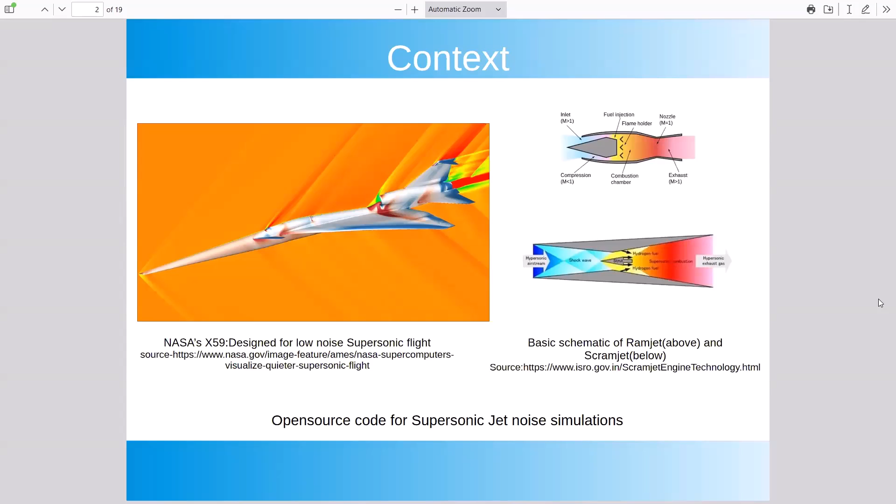So my plan of action initially was I will conduct a RANS simulation. From the RANS simulation, whatever I understand, I'll do an LES calculation - LES is large eddy simulation. And from the LES data, I will sample some data points, and then from there, using the pressure and velocity, I will calculate the noise that the jet generates.

However, in terms of understanding, what happened was exactly the opposite. I didn't get good RANS results. I went forward with the LES anyway. I got poor LES results, I got poor noise results. However, from the noise results that I got, I understood what was probably happening incorrectly in the LES calculation, and from there, what was happening incorrect in the RANS calculation.

So at this point I have to correct something, which is that we are not working with RANS, we are working with URANS. Why is that distinction important? You'll come to know even later on, but primarily, when we are trying to simulate a jet, you have a region in the center, which is the actual jet, which is a supersonic region.

When you look at the governing equations, you'll find that such high speed, high velocity flows will generally have a hyperbolic character. However, the ambient air will have a parabolic character. And it turns out that if you have such a domain where you have hyperbolic and parabolic parts, you cannot have a steady state solution. So you can't proceed with RANS. That was also my experience, although I didn't know about this thing at the time - I just kept trying with RANS and never getting a solution. But it's good that I know this now.

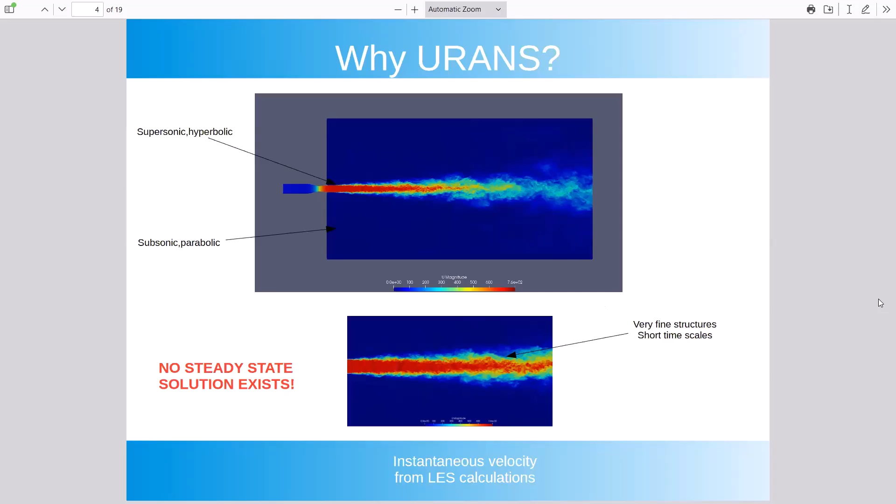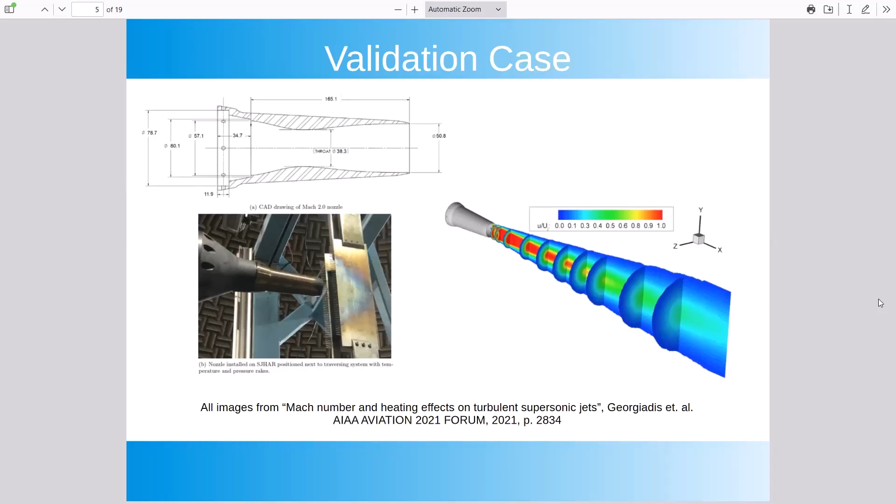So I'll briefly mention what I'm trying to compare my results to. This is an experimental work published in 2021. The thankful thing about this work was that, for reference, what we generally had for a Mach 2 jet was a jet called Seiner's jet, which was basically only centerline data for velocity, pressure, temperature. Thankfully, as we are working with turbulence, this recent dataset also had some centerline values for the Reynolds stresses.

So when I started working in OpenFOAM, I went through what models were available, what solvers were available. What I came to know is there are basically two solvers that people use. At this point, in some version of OpenFOAM, the first solver is obsolete, but I'll proceed anyway - that is Sonic Foam. From here on, I'll refer to it as SF. The second one was Rho Central Foam, RCF.

In the course of my work, I also tried a third solver because I couldn't get good results with either of these two - that is called Rho Energy Foam. It is an independent solver, not part of any original OpenFOAM distribution, but independently developed by two researchers at University of Roma Sapienza. The basic difference between these solvers is how the flux is calculated in the cells. I won't get too deep into that, but that is the main distinction between how they work. They solve the exact same governing equations, but they only calculate flux differently.

The other thing I was working with in parallel were the turbulence models. What I had already seen was that two equation models like K-epsilon, K-omega were known to not give good results with these jets. So I knew that OpenFOAM also offers some RST, Reynolds stress transport models, which will solve for all of the Reynolds stress components individually. So this is the basic set of what I am tackling within OpenFOAM.

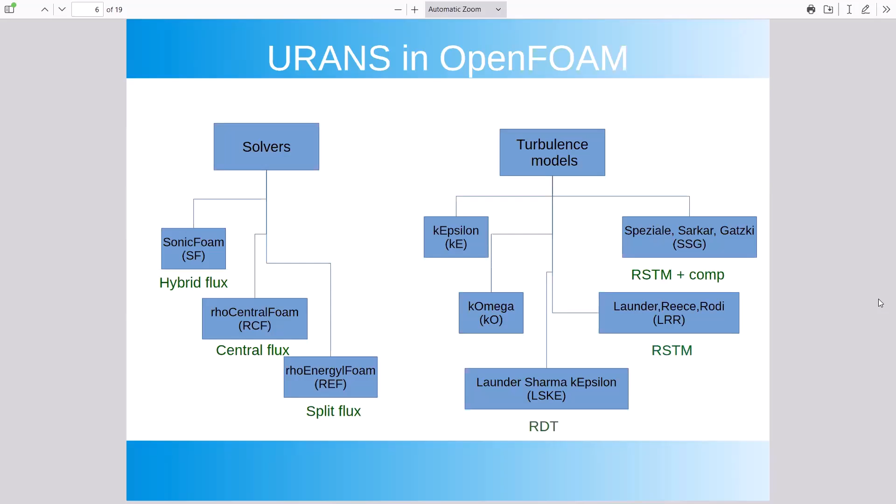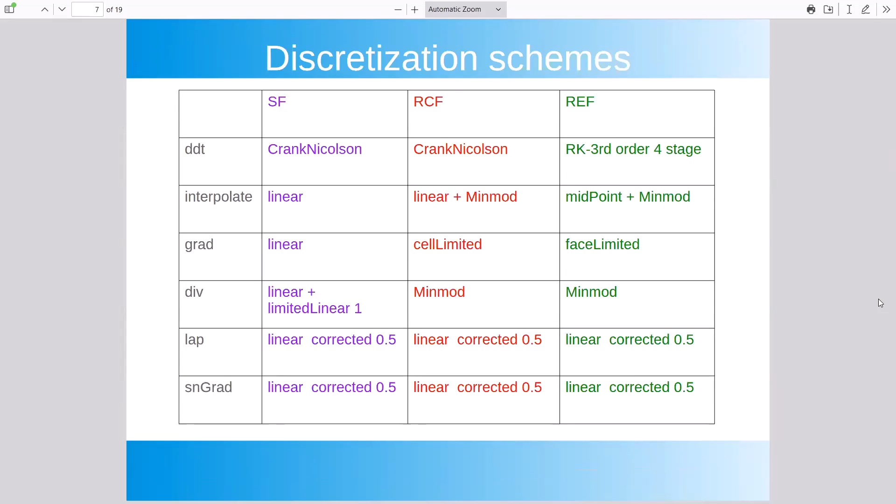Just because we are trying to make results repeatable, I wanted to include this slide. This was what I spent almost a year trying to figure out, as to what discretization would give reasonable results. I won't go too deep into this, but this presentation will be available, so anybody trying to reproduce the result will find this helpful.

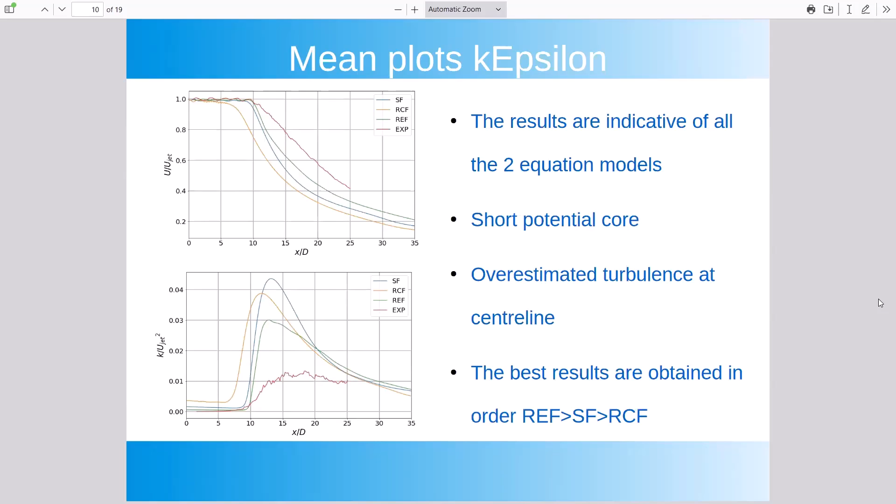This was one of the shortcomings that was very obvious to me when starting the RANS work with two equation models. Now I'll get to the RSTM model. In the RSTM model, the results were better—if you compare it to these, they are definitely better. But the location of the peaks, some of them are too high, so these problems still persisted.

So I tried to figure out what's exactly happening. As I mentioned, the LES results and the noise results kind of indicated what's wrong with the RANS result, and the problem was numerical dissipation.

As a rule of thumb, if you remember nothing else from my presentation, remember this: for a jet, if the numerical dissipation is low, you get a longer potential core. This was one thing that took me a year to understand.

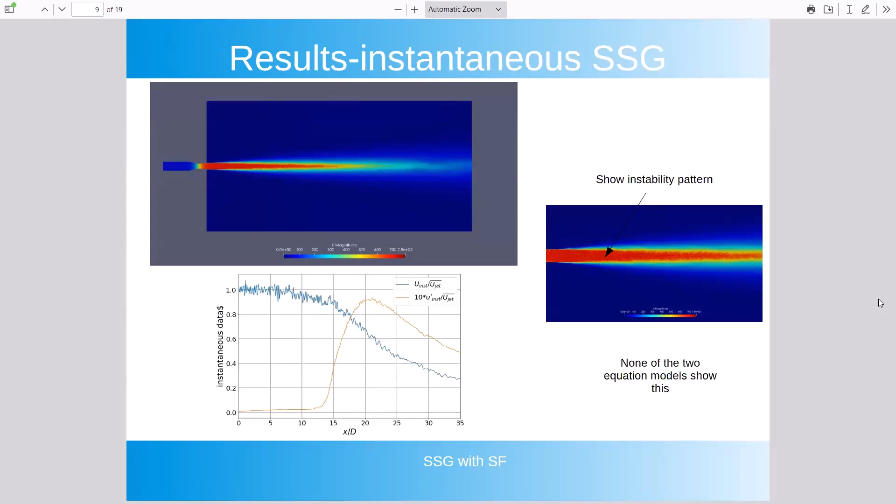The other problem that I faced was in some calculations, I was getting a longer potential core. That was another issue I was not able to figure out why that was happening, and it took me a while to figure that out.

I'll just reiterate. The shorter potential core was an indication that the solver plus the RANS turbulence model together are creating too much numerical dissipation. But what was the reason for a longer potential core? That again took me a while to understand. So this is the gist of what I understood.

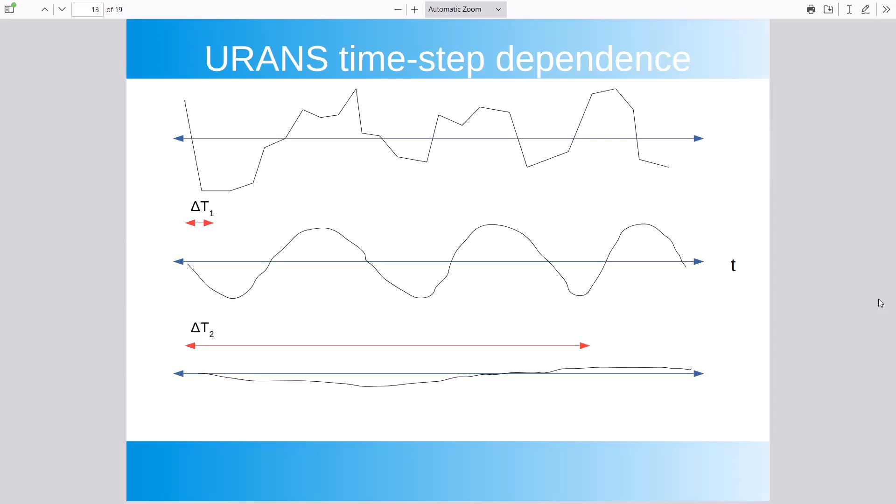If you look at a signal and try to find what you get as a time average, you have a choice of what your sampling window should be. You'll see that if the top one is the original signal, taking a very short time step gives a fairly good, smoother representation of the original data set. However, if you increase your window significantly, you will almost get zero as your long-time means values.

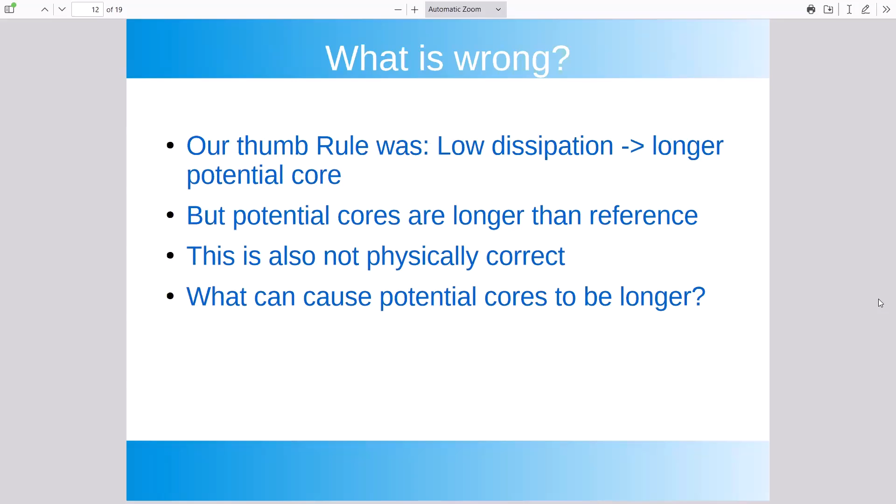So what was happening was that when my time step was too large, the flow gradients were getting smoothened out. And when flow gradients get smoothened out, especially for velocity, they affect the amount of Reynolds stress that gets generated. The issue I was facing was that the Reynolds stress was being under-predicted and the mixing was being under-predicted.

So this is what I wanted to show. The best solution I got was with sonic foam and an SSG model, an RSTM model with compressibility terms included. Initially I got good small scale resolution with it, but I was seeing that it was still too long — the potential core was too long.

The reason was that when I did the calculation, all I cared about was getting a stable calculation with the maximum time step. But it turns out the other solvers besides sonic foam were actually using a much smaller time step. Sonic foam just happened to be more stable with a much larger time step — almost 5 times larger than the others.

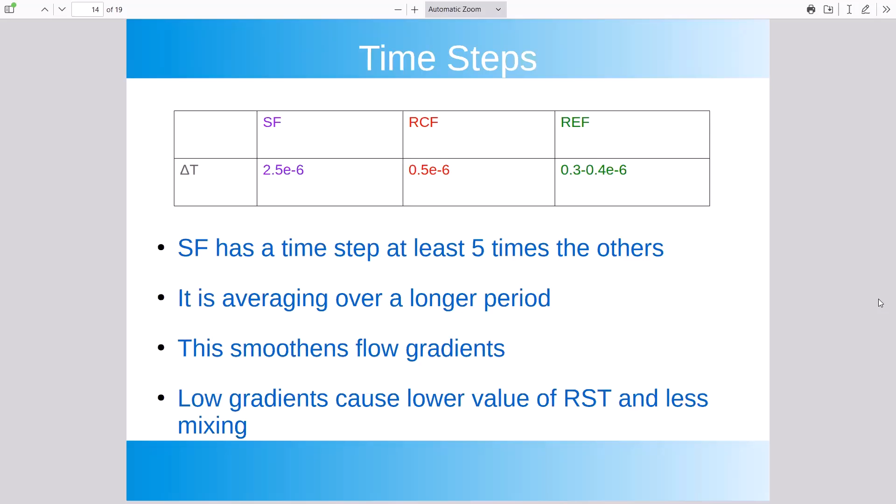And what was happening was that the transient term was actually an average over a much longer time period, and it was actually smoothing out all the gradients. So this is what happened when I changed the time step. I changed nothing else in the calculation with sonic foam — I only changed the time step.

But then the issue was that I was going to do an LES anyway. So eventually, instead of doing URANS on a much finer grid, I simply did an LES on that finer grid.

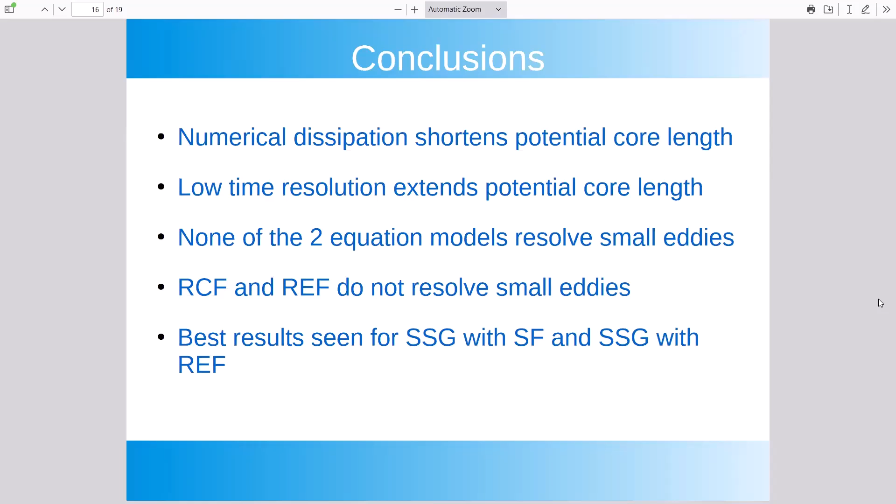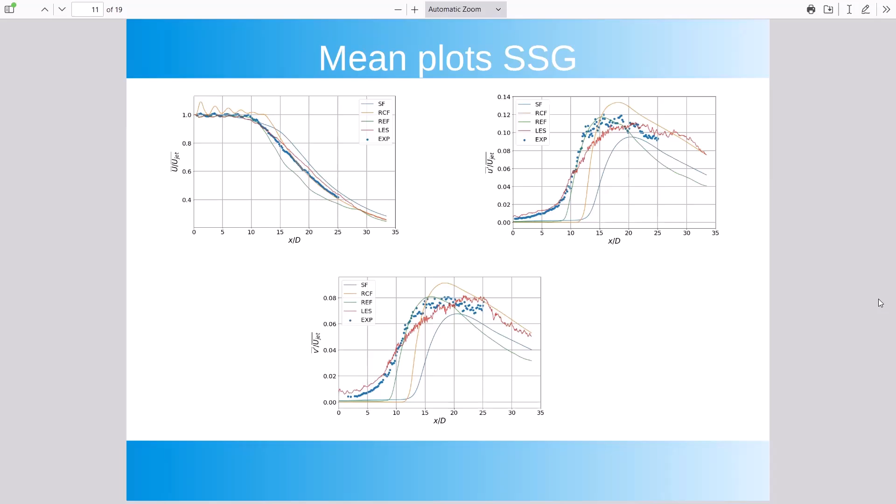So when I reached LES at this point, I simply quit with the RANS. I knew what was wrong in the RANS, which was probably an issue of resolution. But since I could do the LES, I just went ahead with the LES.

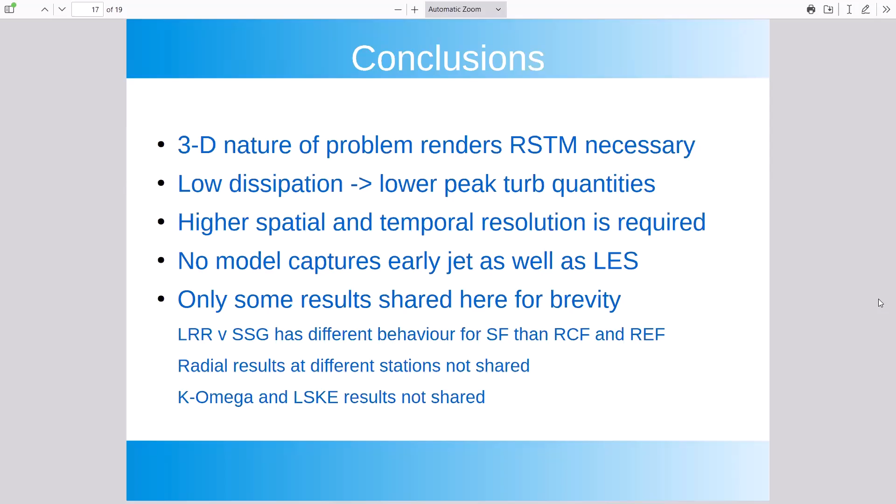Yeah, so there are other results here. Primarily the two things were for me to figure out why the potential core was too long or too short. I did that, but also because I used 3 solvers and 5 models, I had 15 calculations in total. So there are other patterns I saw, but since this is supposed to be only a 15 to 20 minute presentation, I'll keep those results for the final paper rather than discussing them here.

So what is the motivation for this present work? The motivation comes from nature, particularly species of birds who can sweep their wing angles and also modify the effective angle of attack to enhance their aerodynamic performance. As humans, we always try to do biomimicry, to understand the physics of nature and apply it to engineering systems. Here you see an example where an unmanned air vehicle has been built with varying sweep angle to mimic the physics we see in natural flyers.

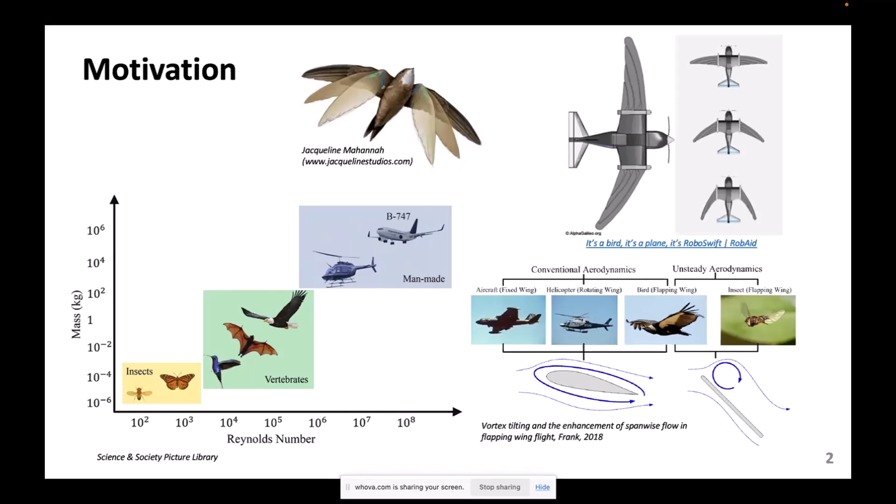This study is carried out at a Reynolds number of the order of 10 to the power 4, which is in the region of small birds, so it mimics the physics we observe in nature for a larger insect or small bird. Our study is focused entirely on understanding the unsteady nature of the leading edge vortex, which is quite complex at this low to moderate Reynolds number regime, and has very rich flow dynamics within it, which is the main focus of this study.

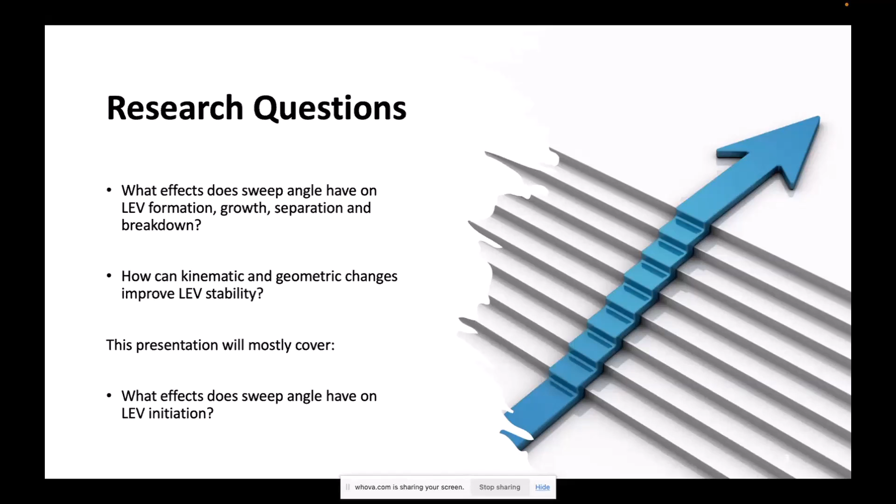Now, what are the main research questions that led to this work? The first, broad question is: what effects does sweep angle have on the LEV formation, growth, separation and breakdown? And how can kinematic and geometric changes improve LEV stability? Given that it's a 10-minute short presentation, I can't tell you everything, but I will mostly focus on what effects the sweep angle has on the LEV initiation.

Now, just to clarify the kind of geometry we are dealing with: we have studied many different sweep angles, many different aspect ratios, and many different cross-sectional profiles of the wing. But for this short presentation, I will mostly present the aspect ratio 3 wings with a NACA 0008 profile, with 3 different sweep angles: 0 degree, 30 degree, and 60 degree.

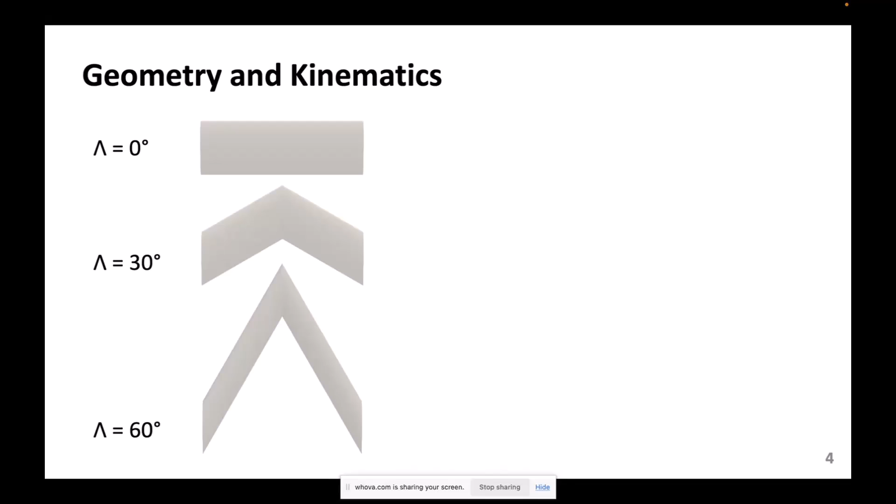This is a representative figure of the experimentally manufactured wing that we are going to test in the water channel at the University of Edinburgh, to measure the flow field and the forces, and also to visualize the flow field using PIV.

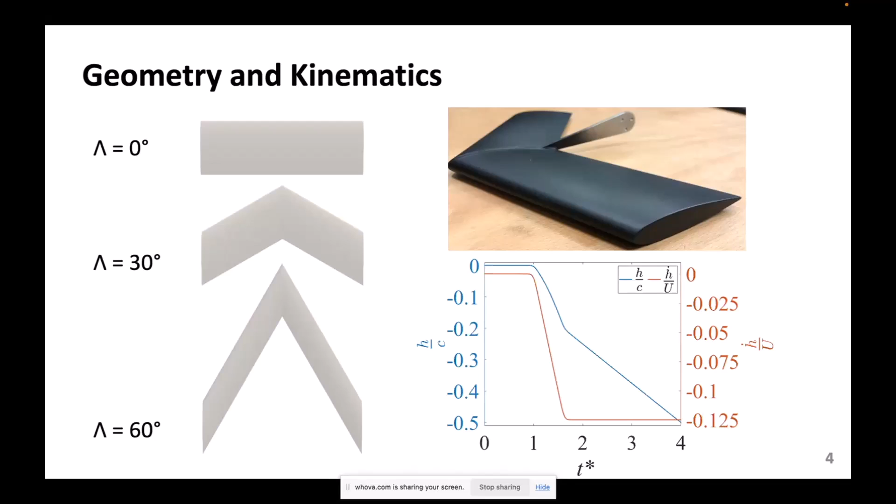For this particular presentation, I have chosen a ramp kinematics. As you can see, the plunge, that is the translational motion rate, is a ramp here, shown in the red curve. That's because the h dot, the rate of the plunge divided by the free stream oncoming velocity, gives us the effective angle of attack, which also gives this resulting plunging kinematics, shown in blue here.

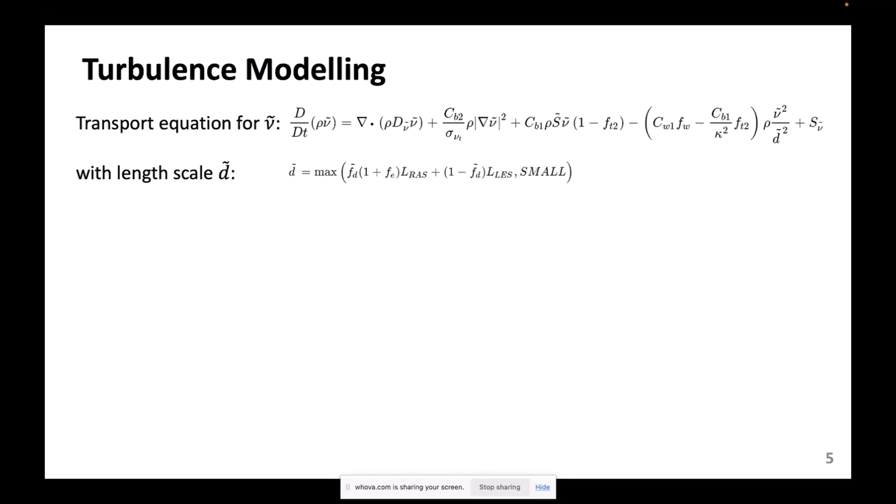I want to first confirm that we are using this Spalart-Allmaras based improved delayed detached eddy simulation model. As you all know, the main difference from the other variants of DES is that the turbulent viscosity formula is based on a modified length scale, d tilde, which is based on the wall distance for the RANS model and the mesh size based length scale for the LES model.

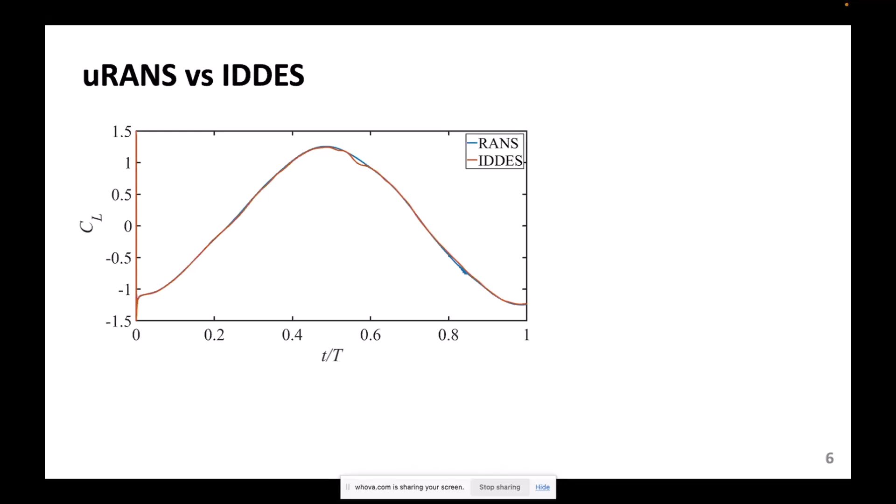Before going into the physics, I want to show you the comparison between the unsteady RANS and the IDDES results. This comparison has been done for canonical plunge kinematics, which is sinusoidal in nature. As you can see, the coefficient of lift is almost very close between the two. Only there are some fluctuations captured at the peak, which correspond to fluctuations in the leading edge vortex.

As you can see in the Q criterion flow visualizations, in comparison to the RANS model, we can capture way more small turbulent structures, and the interactions between the leading edge vortex and the tip vortex, very clearly using this IDDES model. So this is the motivation for us to choose the IDDES model for our further investigation.

This is to clarify the coordinate system. Our origin of the coordinate system is at the root of the wing, and the X and Z axes are along the chord and the span.

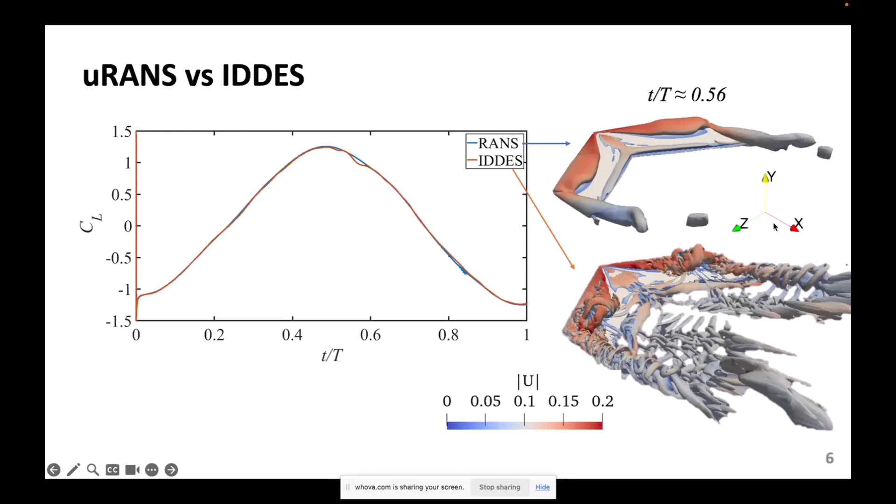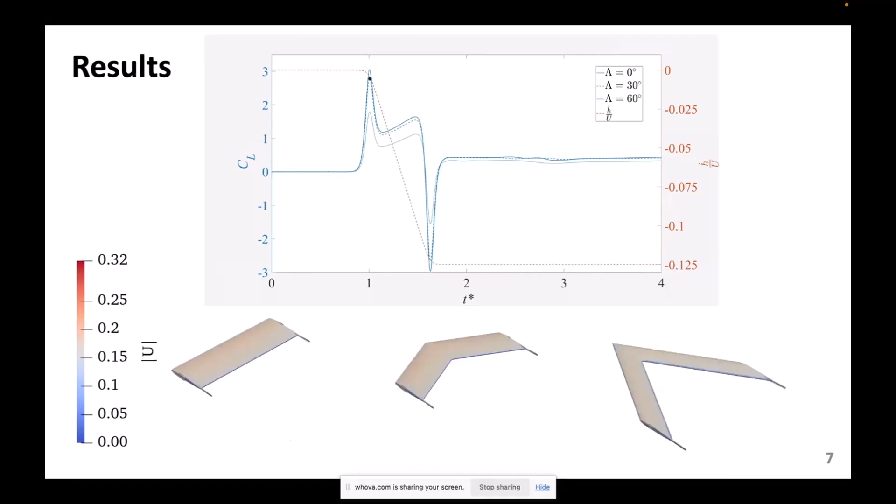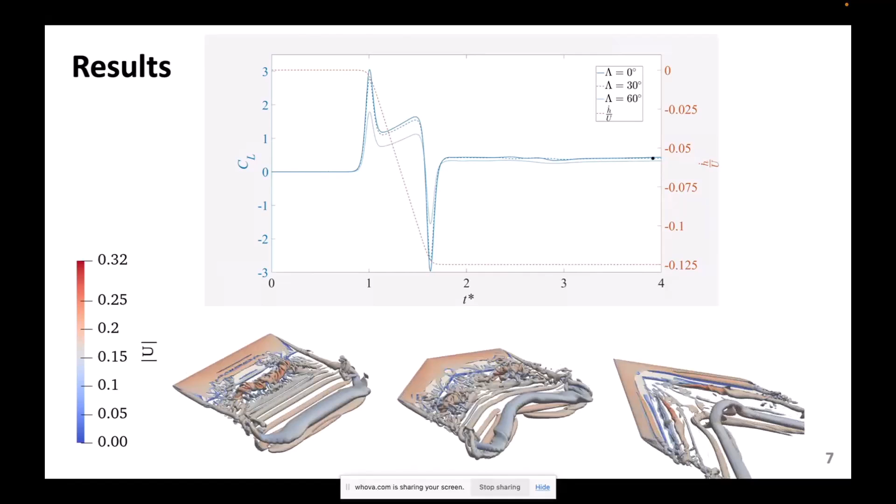In the downward motion, the lift actually first linearly increases, then it goes down. You can see in the Q criterion flow visualization techniques below how the leading edge vortex is initiated as the aerodynamic load changes. I am going to discuss this in further detail in the upcoming slides.

Let us look into slowly how the leading edge vortex is generated and how we can capture this. This is the case of the sweep angle 0 degree, and of course you are seeing the flow visualization for the half wing.

So basically from the root to the tip, and you can see in the right figure the pressure contour, that is the coefficient of pressure, which basically shows you this blue circular portion and the blue lines. This shows you basically the formation of the leading edge vortex leg, which is represented by the negative pressure.

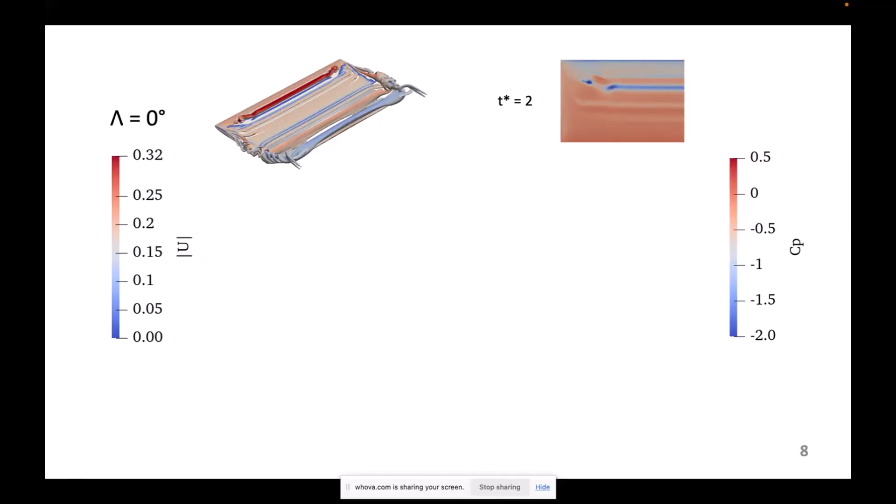As we go with time, we can see that this leading edge vortex gets shed, and the leading edge vortex ring becomes nonlinear in nature. That's why you see these wiggles in the blue negative pressure regions.

As we go to the non-dimensional time 3, or the convective time 3, we see that the leading edge vortex has become completely nonlinear, and it started interacting with the tip vortices leaving the trailing edge of the wing. Since the leading edge vortex is passing over the trailing edge, we don't see any negative pressure regions in the pressure contour of the surface.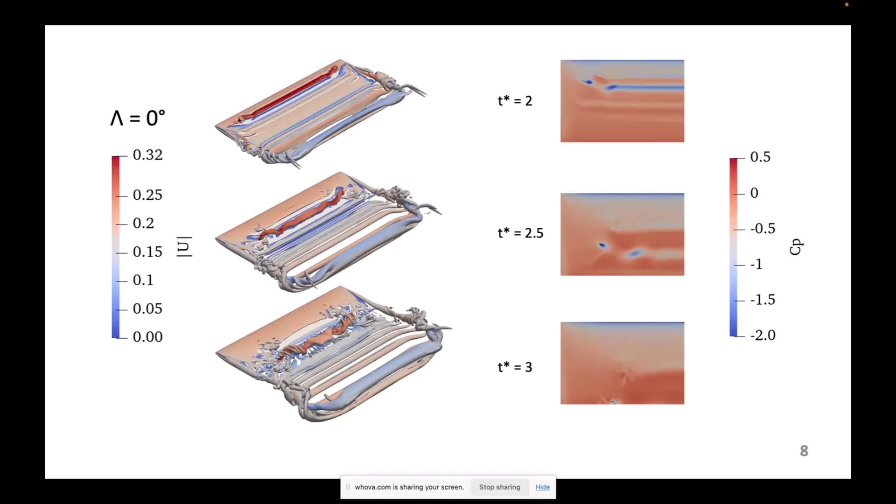Now, keeping this in mind, if we go to the next sweep angle of 30 degrees, we see that the flow dynamics has changed quite significantly with respect to the no sweep angle case, because of the geometry. When we introduce sweep in the geometry and it undergoes a ramp plunging rate, it changes the acceleration significantly due to the geometry.

Here you can see that at the root region in the middle of the wing, the leading edge vortex strength is quite less, and the whole leading edge filament is not continuous, it is divided into two parts by the sweep angle.

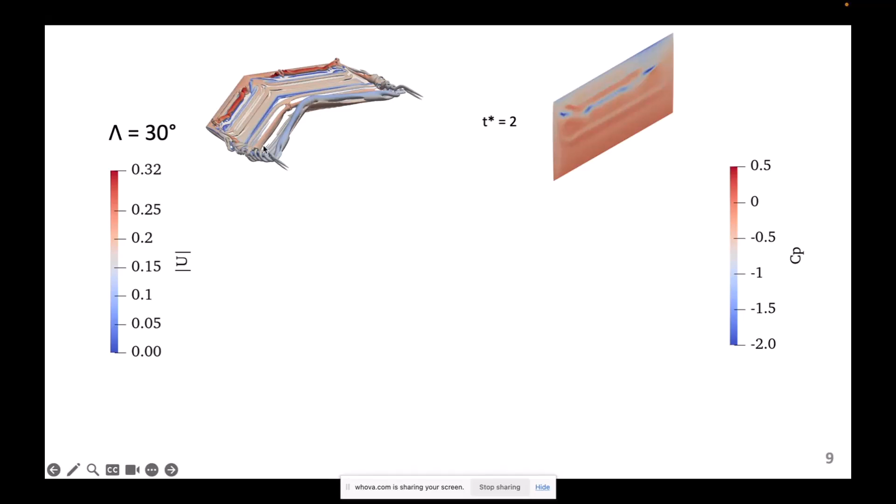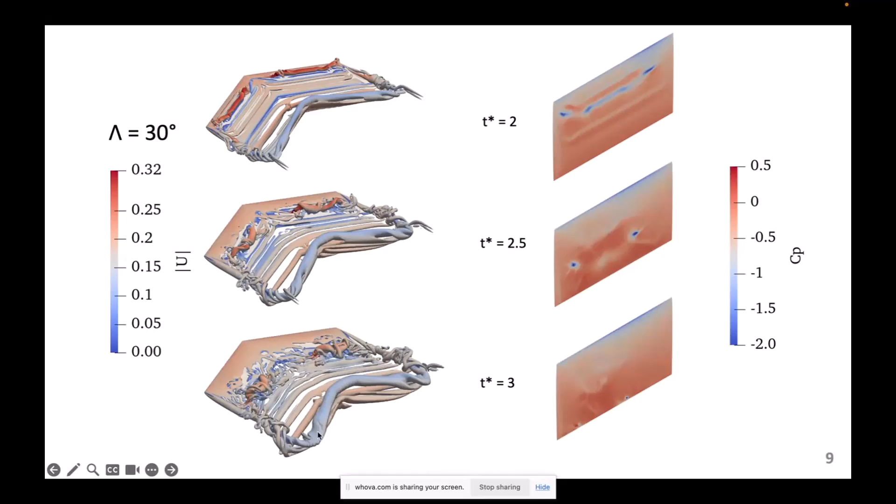As we go further, in this two swept part, the leading edge vortex gets shed separately. Compared to the previous case at this convective time of 2.5, the degree of nonlinearity is quite high. As we progress, we see that this coherent leading edge vortex legs get shed from the trailing edge, and with time they join again and form an arch vortex, which is very clear from this figure.

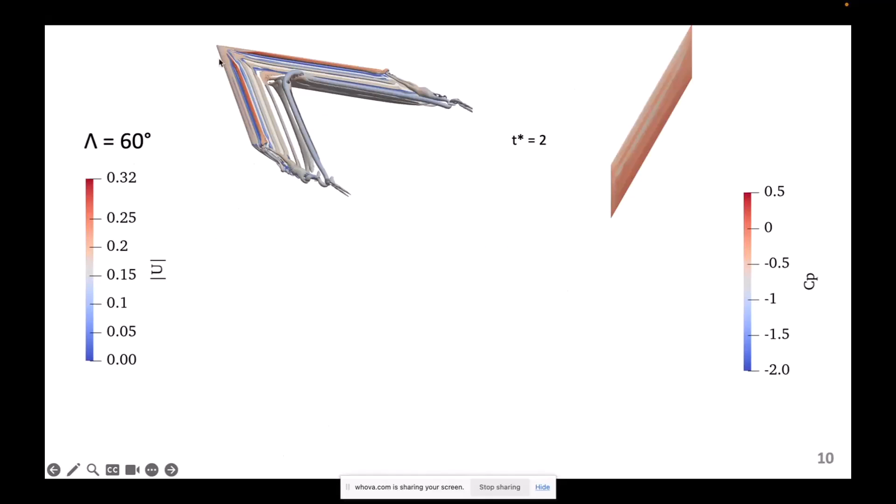This physics becomes more dramatic as we go towards the very high sweep angle of 60 degrees, and we can see that there almost the leading edge vortices are attached due to this high sweep angle, and we do not see any leading edge vortex separation leg in terms of the low pressure region. As we proceed with time, even through the whole time span till it leaves the trailing edge, the vorticity remains quite attached, and they are not separated.

Another noticeable thing is that at the root of the wing, the strength of the leading edge vortex increases, which gets fed from the vorticity at the leading edge of the corner root. So that's another important thing to notice here.

Now, we need a way to quantify this effect. Till now I have explained qualitatively what happens in the initiation of the leading edge vortex, but we have a way of measuring the suction at the leading edge of the wing, which can be done in terms of the leading edge suction parameter, or LESP, which is established in the literature.

It is nothing but a measure of the leading edge suction, measured by this A0 parameter, which is the Fourier coefficient of the first order term of the bound vorticity of the wing. Till now, this measure has been applied for 2D cases, and we have no knowledge how we can extend it for 3D flows. So we tried to explore this measure to apply to our cases.

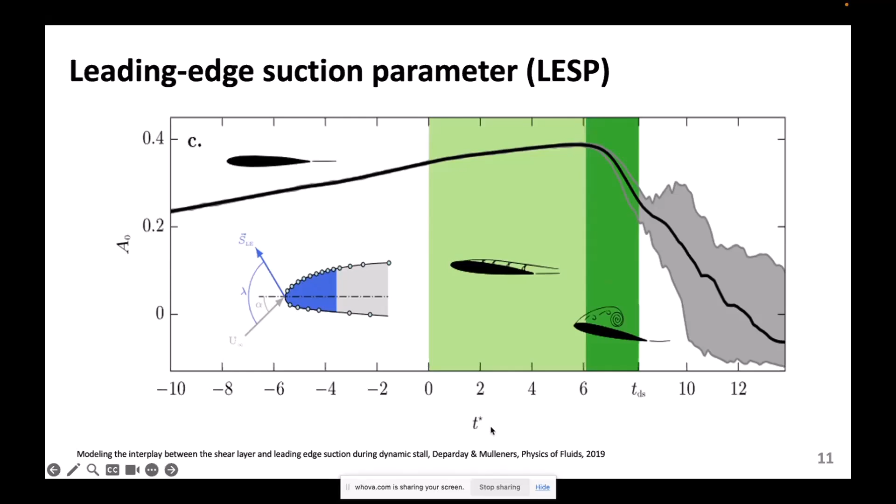Now when we calculate this LESP value for our cases, we take it in a quasi-3D manner. That means we calculate it separately in different 2D planes along the span: at the tip, at the root, and at the 40% span.

Now for the unswept wing, the trend is the same for all three planes, as we go with time the value of this leading edge suction parameter increases, and beyond a critical value it decreases, which denotes the separation of the leading edge vortex. But for the 40% span and the root planes, the leading edge suction parameter is quite higher compared to the tip region.

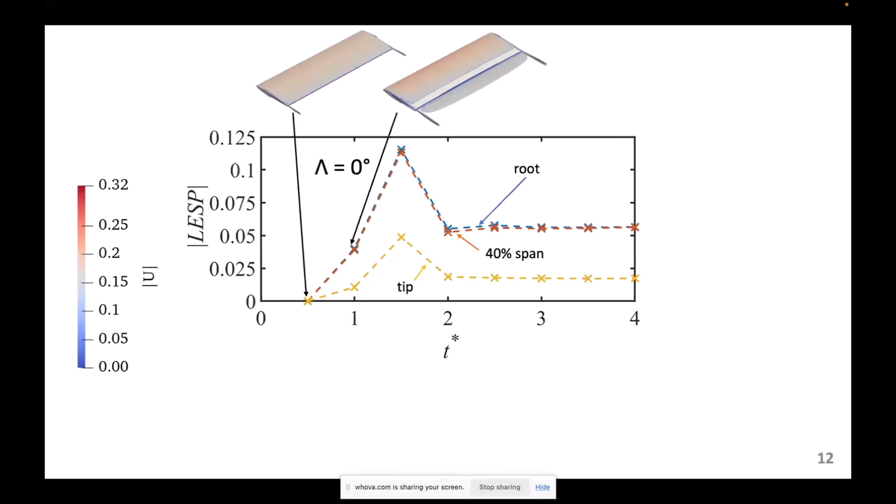And you can see the corresponding stages of the flow fields, which I have already explained. So this is pretty clear that even for the unswept case, as we go along different spans, this leading edge suction parameter varies.

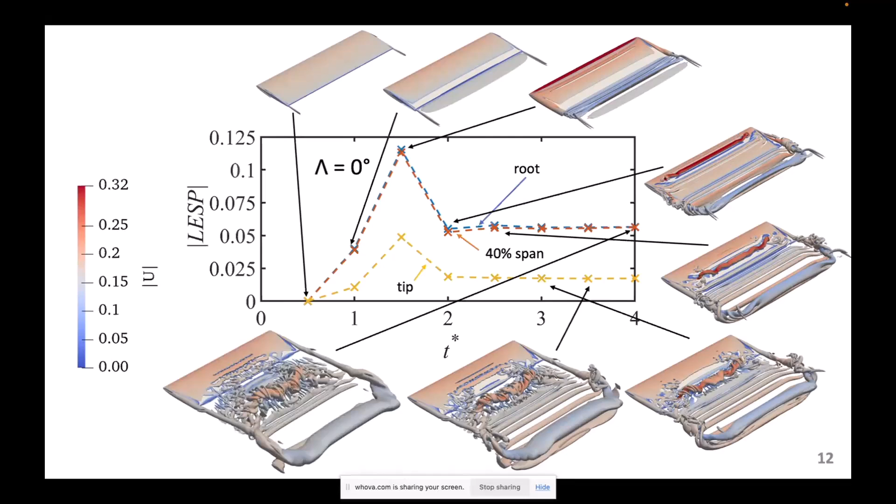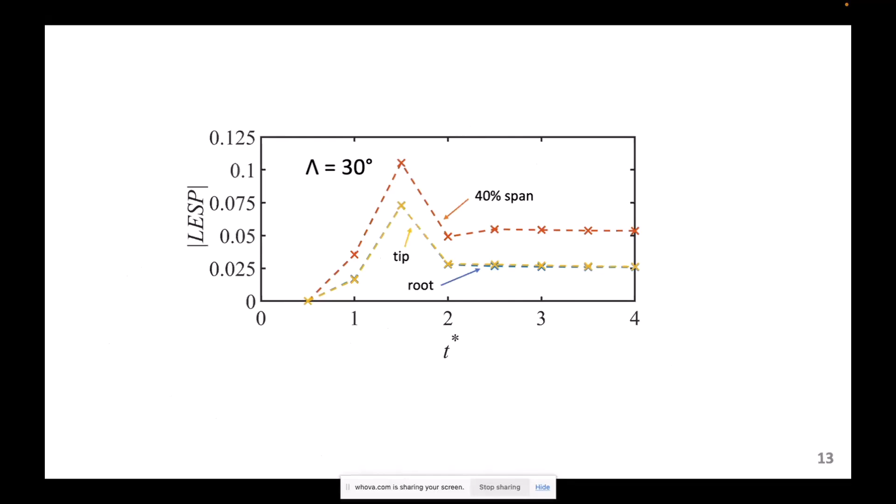Now, if we go for the 30-degree sweep angle, we see a significant change in the trend. Previously the root plane had the highest leading edge suction parameter along with the 40% span, but in this case the tip and the root planes are actually the same, and the 40% span case gives us the maximum value of the leading edge suction parameter. However, the trend is the same: as we go with time, beyond a critical value of the leading edge suction parameter, we see the leading edge vortex get separated, as I have already explained qualitatively.

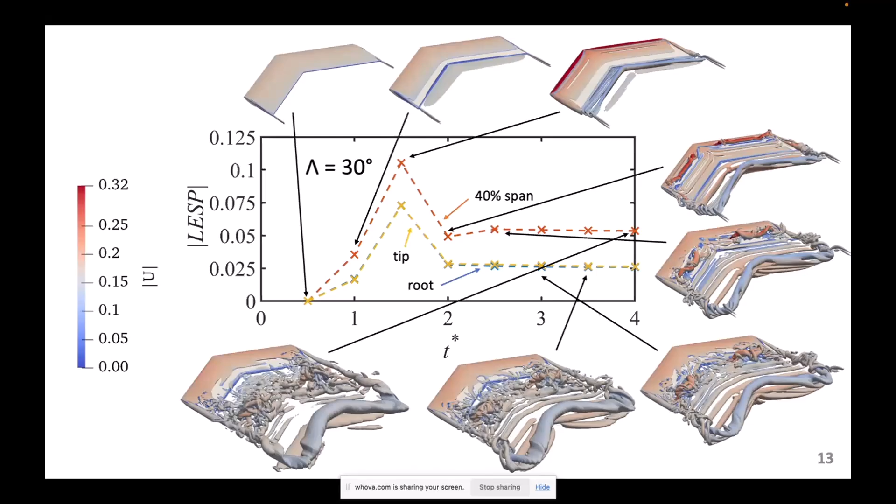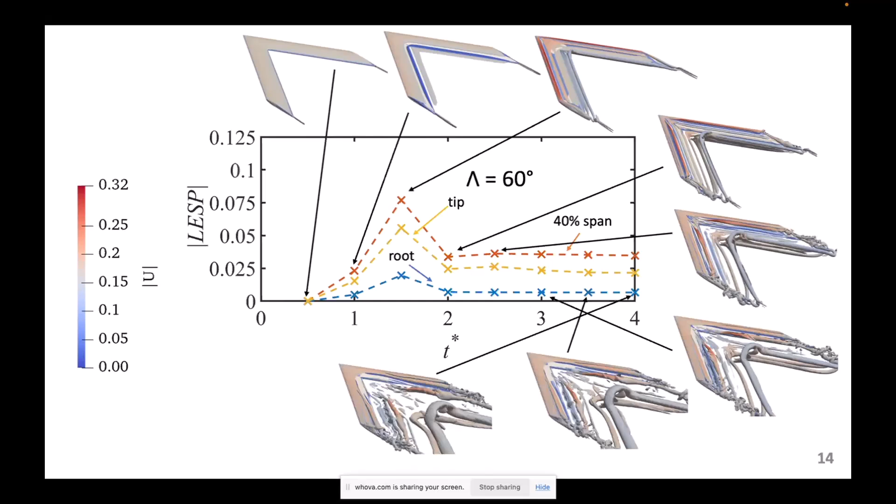Summarizing this fact, if we compare the case at the root of the wing, we see that as we increase the sweep angle, the strength of this LESP parameter decreases. That means that as we incorporate more and more sweep angle, the strength of the leading edge vortex becomes more and more weaker.

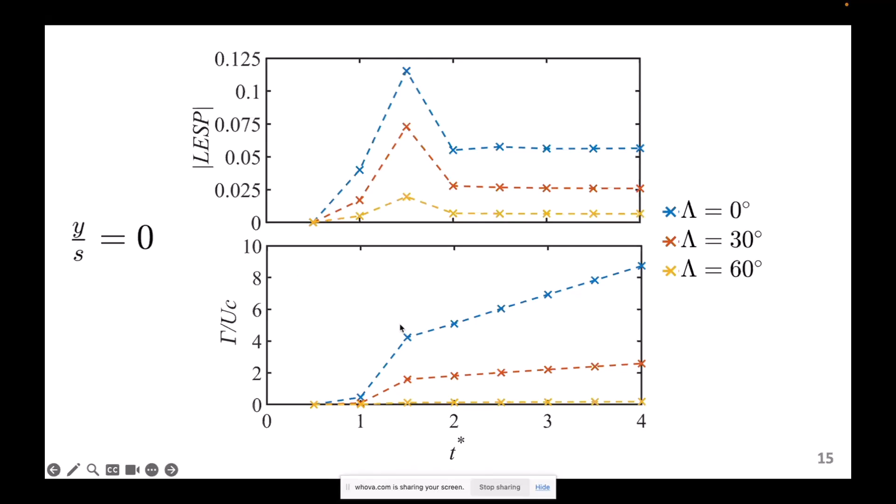And note that it is calculated on Z-normal 2D slices, but we did not incorporate the increase in the Z direction flow. So of course, it can be corrected with more stringent LESP criteria.

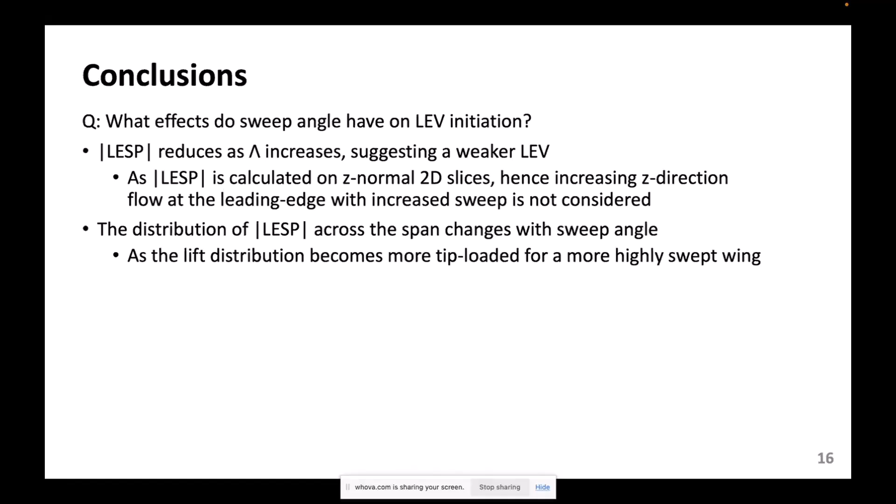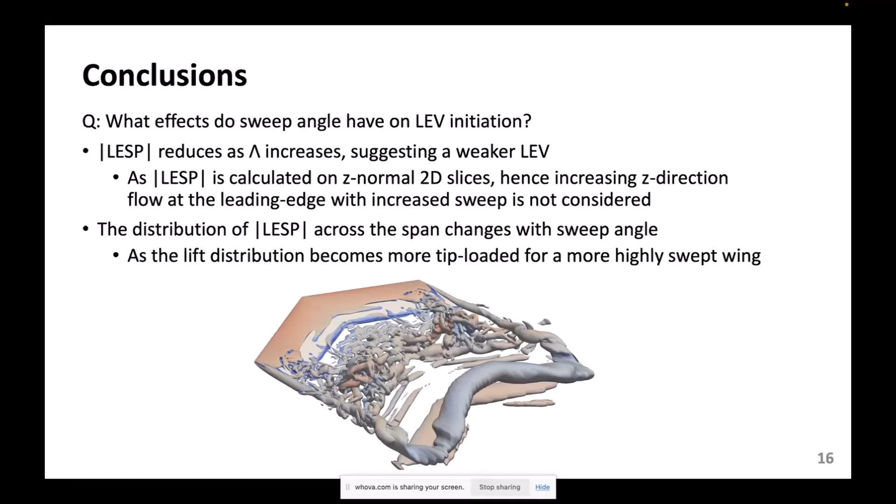And the distribution of LESP across the span changes with the sweep angle, as the lift distribution becomes more and more tip loaded for a more highly swept wing, and there is more to study. So this presentation only shows the initiation of the tip leading edge vortex, but there is more to study about its interaction with the tip vortex and the breaking down of these nice coherent arch vortices as the degree of turbulence increases. That I will keep for a future presentation.

And the future work will actually go back and address our main research question that we posed, and the results will be validated with experiments carried out at the University of Edinburgh. We acknowledge Professor Ignacio Maria Viola and my colleague Suji for carrying out these experiments. And keep an eye on my research group's work at the Bio FSI lab of the University of Birmingham. If you have further questions regarding this, you can always contact me.

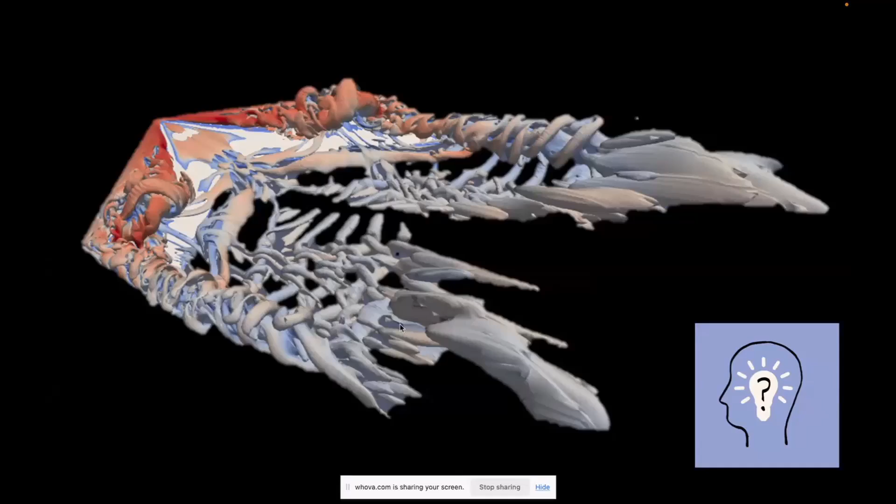Hello. Sorry, thank you, Chandan, thank you. We made applause to you, but we were muted, so you cannot listen. Okay, thanks for the nice presentation. Very good job, good quality.

Are there any questions from the audience? Yes, from Charles. Charles, maybe you can come here. There is a question from Charles Mocket coming here. Okay, yes, hi Charles. Hello. Maybe you mentioned it, but I might have missed it. What's the Reynolds number based on the chord length for these?

So for this presentation, we are doing a Reynolds number of 20,000. Thank you, thank you Chandan.

Sorry, I think you have to run a lot of simulations. What is the time for one simulation, and how many in total do you have to do for this DOE? Essentially it's a DOE at the end of this story, right?

Yes, I should have given these estimates for this particular audience. So these simulations are done with different mesh qualities, but on average I would say they have around 15 to 20 million cells. These simulations are run on the National Supercomputing System of UK, Archer 2. And these are quite expensive, to get around 5 to 10 periodic cycles of these pitching or plunging cycles, we take around 3 to 4 weeks.

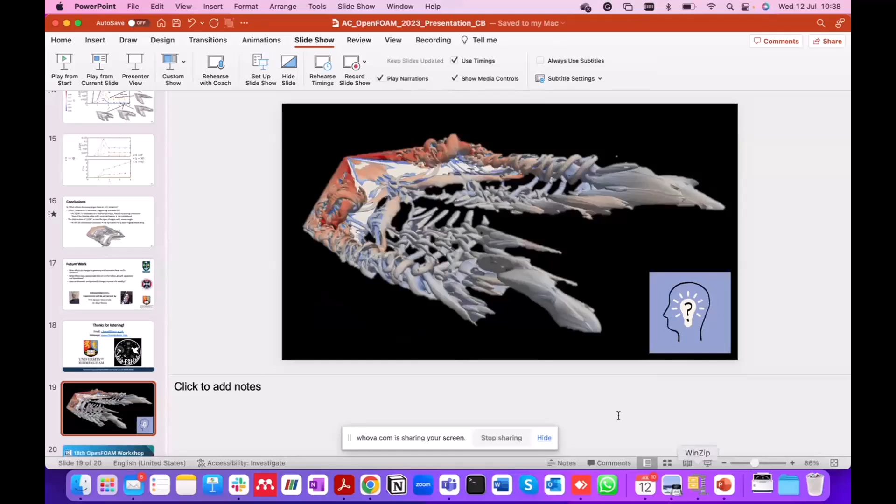I think this problem is very complex, so we need to run many cycles to understand what's happening actually. It could be interesting to try to optimize this calculation on HPC—even saving some percent could be nice. Yes, I think that's where the next direction should be. We have to really focus now on optimizing the simulation, which we have not spent much time on.

Probably there could be a chance to use AmgX from NVIDIA for the linear algebra. Maybe you can see the talk tomorrow—there we talk about that. I will attend surely.

Thank you. Okay, thank you, Chandan.

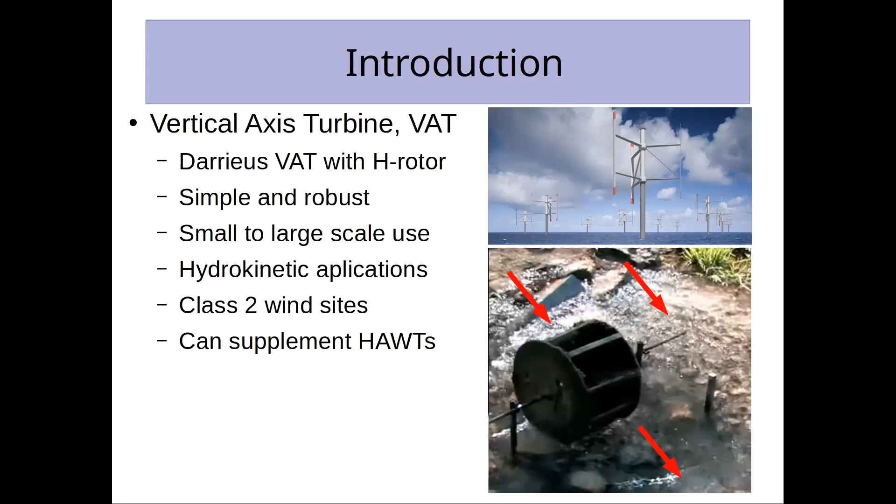For this topic, we are choosing the Darrieus type vertical axis turbine with H-rotor, because it is simpler for design and manufacturing, and robust. We can talk about many things, but I'd like to show this one.

A vertical axis turbine, if you consider this cross section in 2D, has the blade rotating on a circular domain. We can understand this circular domain in two halves: upwind pass and downwind pass. In the upwind, there is clean flow, and when the turbine passes through here, it will capture around 80% of the torque required.

In the second half, since the flow is disturbed, it captures much less. The first figure is a top view of a vertical axis turbine trajectory using typical operating conditions, like 67,000 Reynolds number based on chord and free stream velocity 0.183, and tip speed ratio lambda of 2.5. The torque curve for this is shown in the second figure.

In the red zone, we have upwind and downwind, and for detailed aerodynamic discussion we can see 4 different segments. In this region we have the highest torque—it depends on the tip speed ratio, it may go up or down.

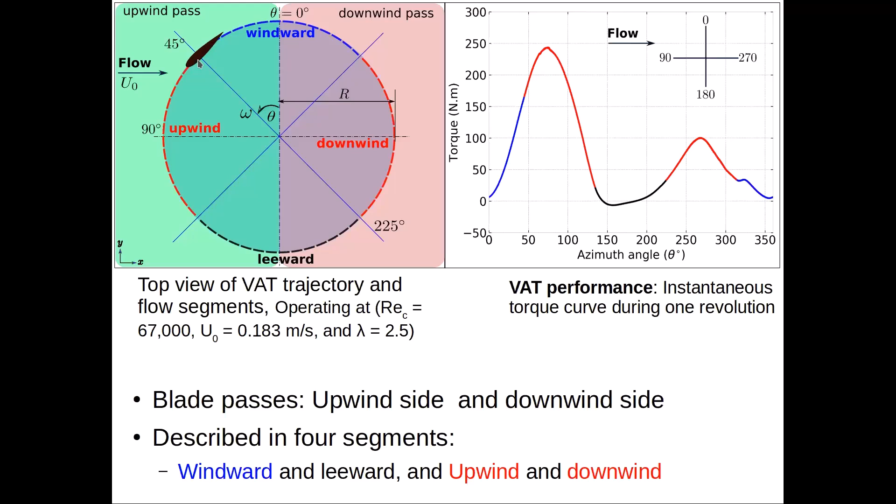Because of this, when the turbine passes through the flow, it creates pressure differences in the locality, and this pressure difference will interact with the incoming upstream and with the wake downstream. This creates complex pressure wave interactions, and it is a little complicated. Even if the wind speed or rotor speed is constant, this complexity is always there.

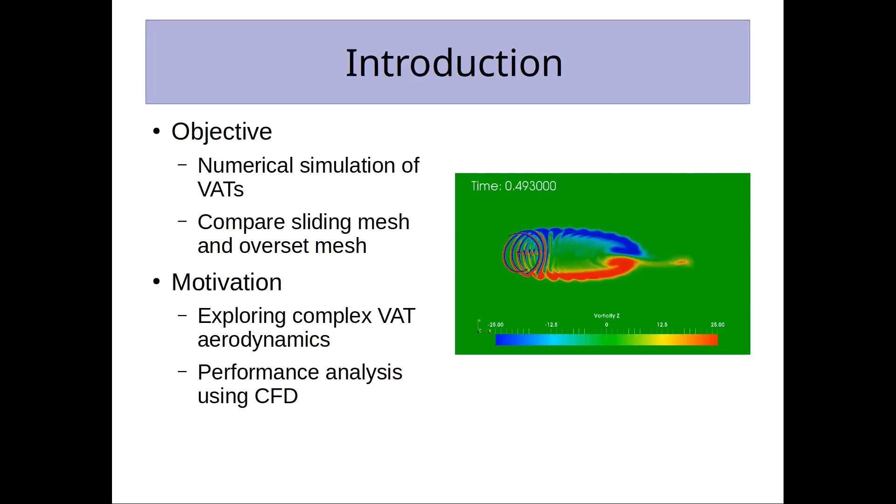Our motivation is to explore this aerodynamic aspect using computational fluid dynamics. The main objectives are the numerical simulation of the turbine using the two methods. The next part covers some aerodynamics and technical terms, but I'll skip ahead to speed up. The main parameter we need is the torque coefficient.

We are calculating torque of the turbine. In the first plot, we have the velocity vectors, to calculate the relative velocity and angle of attack, and after that the force vectors. So we have the tangential force coefficient, the tangential force, and normal forces.

This is the relative velocity direction. The force will be perpendicular to this, lift force, and parallel is drag, or it will be in the normal and tangential directions. The resultant force is the resultant of any of this group, and any small component will keep it driving forward.

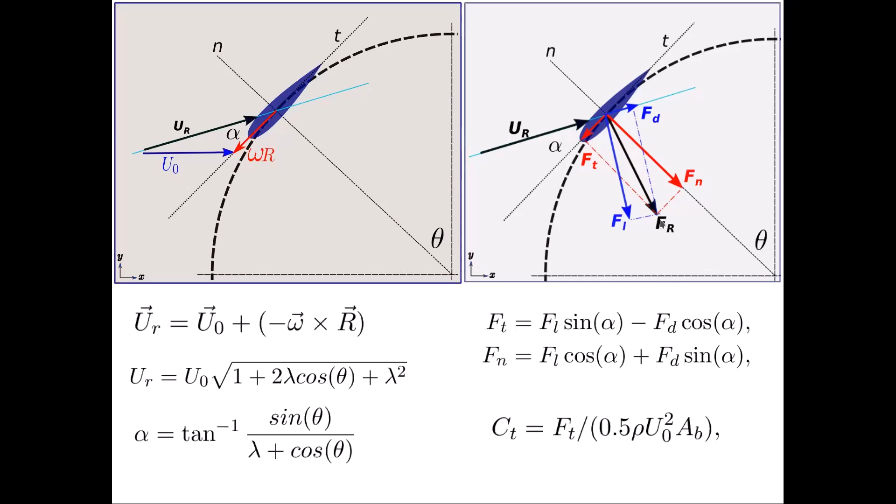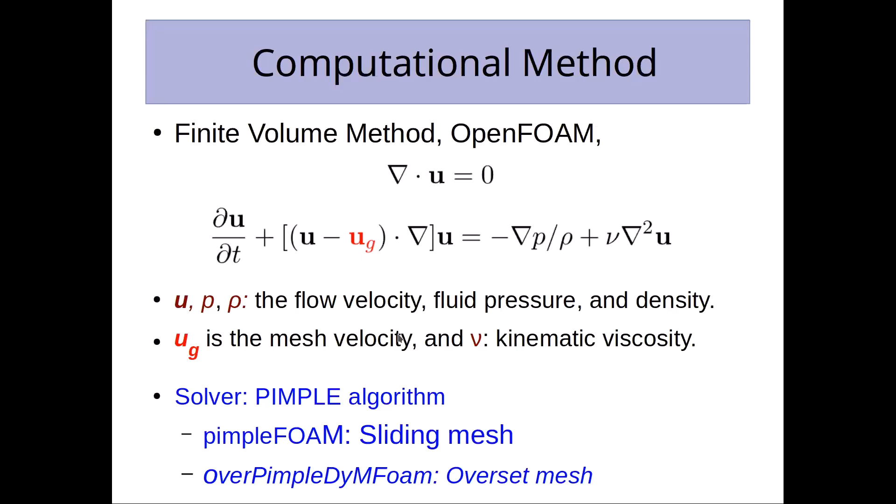In the computational method, I would like to talk about the solvers. We are using pimple-based algorithm, and for the sliding mesh, pimpleFoam, and overPimpleDyMFoam for the overset mesh. These are the simplified incompressible Navier-Stokes equations. We are incorporating this u_g, which is a mesh velocity, to account for the moving wall boundary condition.

Turbine specification: we are using a single blade turbine with airfoil cross section NACA 0015, chord length of 0.15, and turbine radius 0.61, for a Reynolds number of 67,000 based on chord. We have 3 tip speed ratios: 2.5, 5.1, and 7.5, and rotor speed is constant at 0.75.

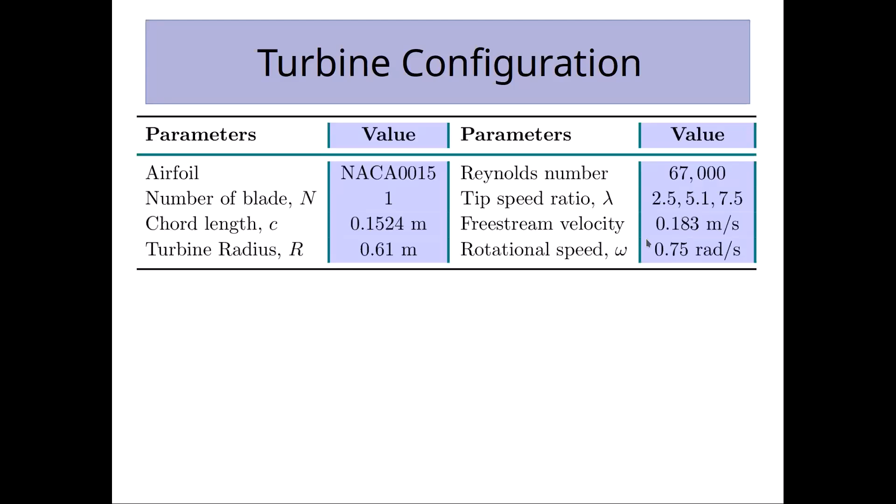For the first one, the velocity will become like this, and for the others we will calculate. Using this turbine configuration, we choose a computational domain, which is a square domain basically, parameterized based on the radius of the turbine. This is R, which is 0.6, where the turbine rotates.

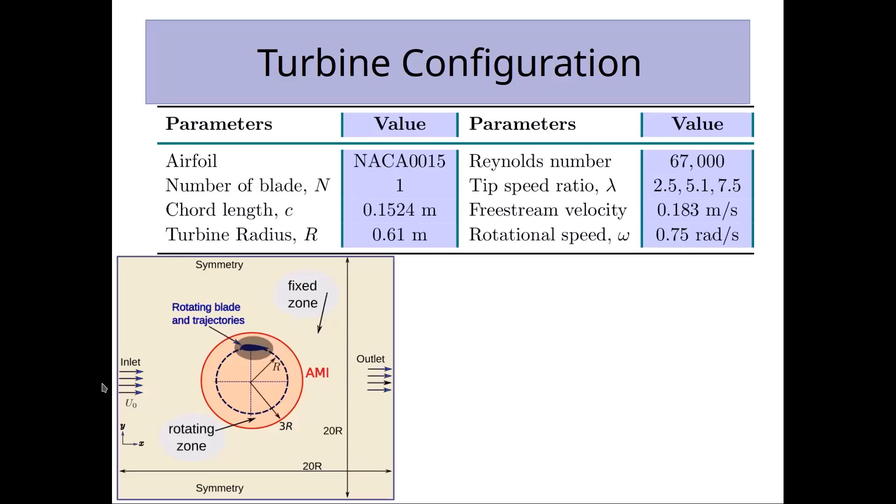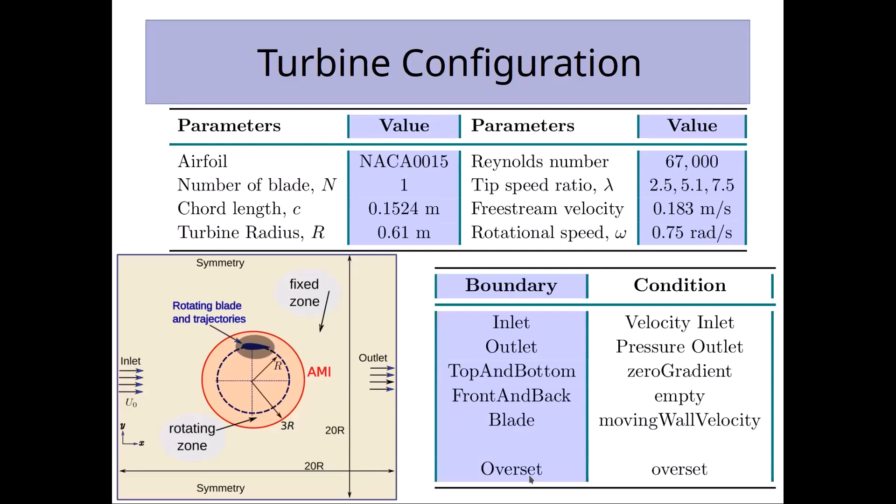For sliding mesh, we need a rotating body, so it will be 3 times R, and the domain size is 20R by 20R. We have the inlet here where we define velocity, and at the outlet, constant pressure and zero gradient velocity. The blade will be having a moving wall boundary condition, and the overset patch will be the overset boundary.

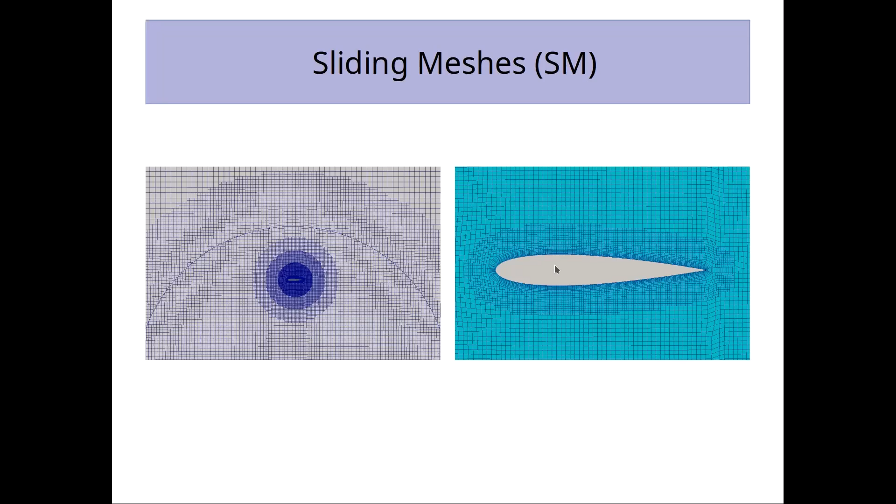The first choice is 1E-3, the minimum thickness near the airfoil. With 10 layers of expansion ratio 1.15, we are able to use around 60,000 cells for the simulation.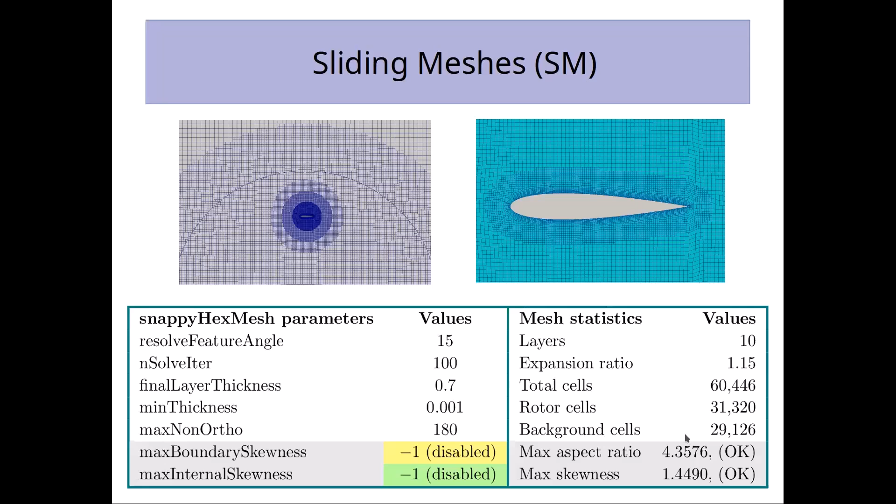With these properties, we have maximum aspect ratio and skew ratio within the limit. Many simulations of this type in turbine research use around 1 million cells or 600 thousand and more, but since we have limited computational resources, we are using this.

The first point we wanted to study was which airfoil we have to choose, because in the literature it mentions so many options like 21 or others. The basic thing is airfoil selection: either you design your own airfoil or you choose whatever is there, like NACA series airfoils, especially the symmetric ones, which is okay because it interchanges phases in the domain.

For our case, depending on this particular Reynolds number, the thinner airfoil seems to be producing higher torque. But because of structural limitations of material strength, we don't want to go to 10 or 12.

Then, how many revolutions are required for the turbine to converge? We have simulated up to 24, and after 8, the difference is negligible. We also simulated using different turbulence models. In the literature, the widely used ones are SST, K-omega, and RNG epsilon turbulence models.

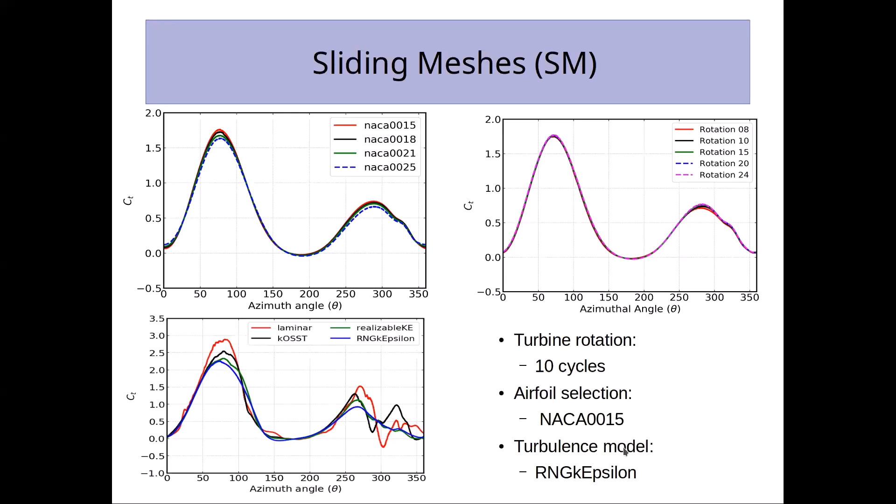So we go with 10 cycles, NACA 0015, and the RNG turbulence model. Based on this, the complete simulation of the turbine, which is converged, we have compared it with Oler et al., using the sliding mesh.

This is an experiment done in 1983. The experiment is not 100% accurate, it has some limitations, but it will give us a guide to where the results should be.

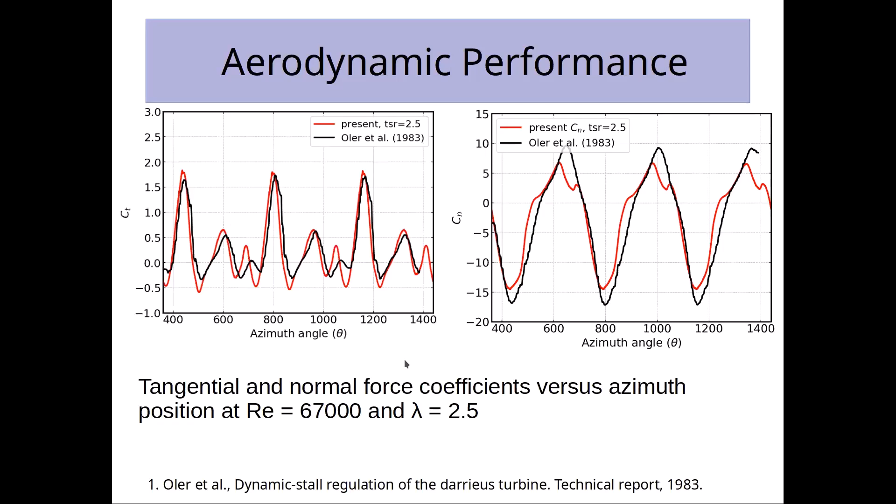We have considerably good matching for the tangential force coefficient, with some differences for the normal force coefficient. When we increase the tip speed ratio from 2.5 to 7.5 across a series of 6 simulations, the torque reduces.

And overset meshes, the basic details we have not included, but we have tried to create meshes. The basic idea here is the meshes are created separately. We have airfoil mesh separately and background mesh separately, and we merge the meshes, creating the overset patch for the interpolation of fields.

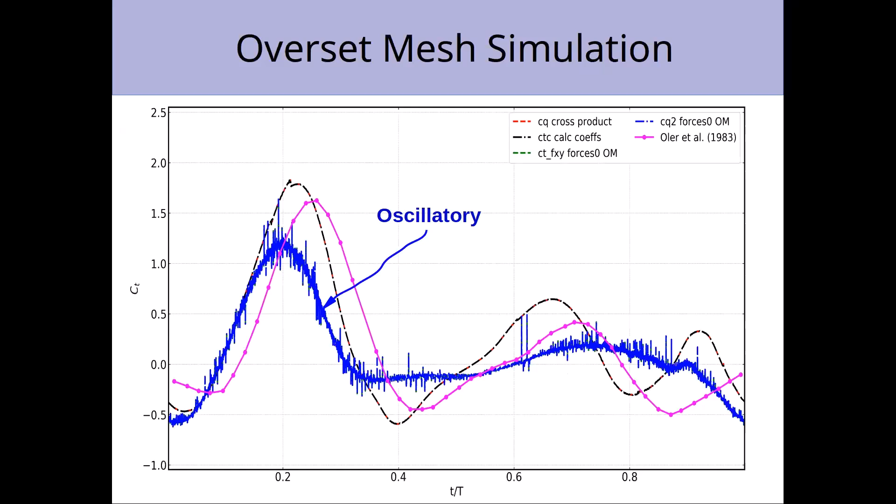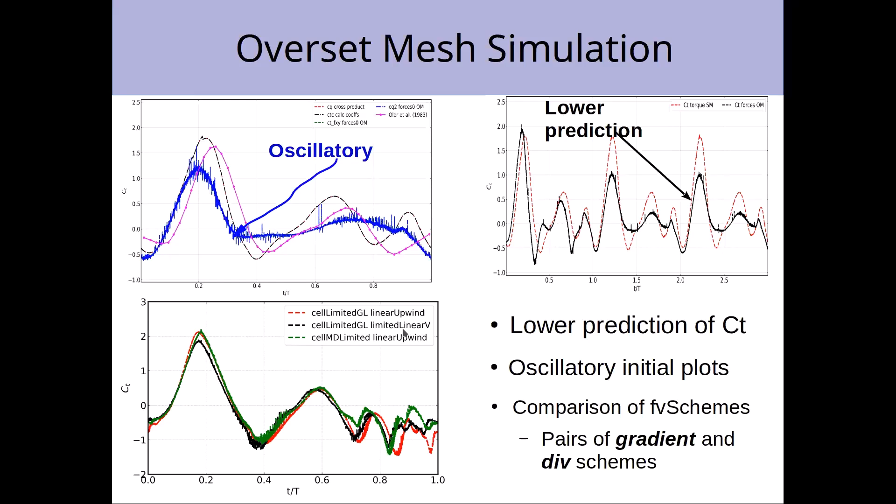So our initial simulations were having more oscillations and under prediction. Based on that, we have experimented on several combinations of schemes, like gradient scheme with divergence scheme, first order, second order, with turbulence, which works and which does not work. So we tried this.

Changing the overall size of the overset mesh and the shape of the overset mesh, like elliptical body. We are able to see this will give better smooth results with less oscillation and more accurate, because at least we are able to maintain one-to-one matching of the cells of the overset and background at the intersection.

So also we have to choose the overset interpolation methods: cell volume weight, inverse distance, least squares, and tracking inverse distance method. Least squares takes a lot of time, for example this simulation for 2 seconds of part of the turbine. Then with turbulence it will increase further. The least squares becomes more oscillatory and is time consuming, and I think it is difficult with moving bodies.

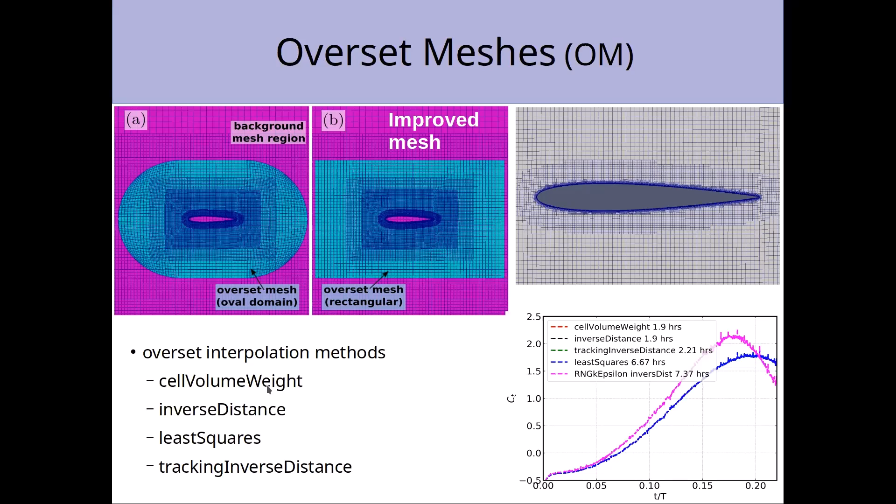And the last one has difficulty tracing the holes. The first two are very good: cell volume weight and inverse distance. So we are using inverse distance for the simulations.

So we have also added local time stepping and varying control, CFL control or Courant number. Based on this, we are able to get faster and less oscillatory, convergent results.

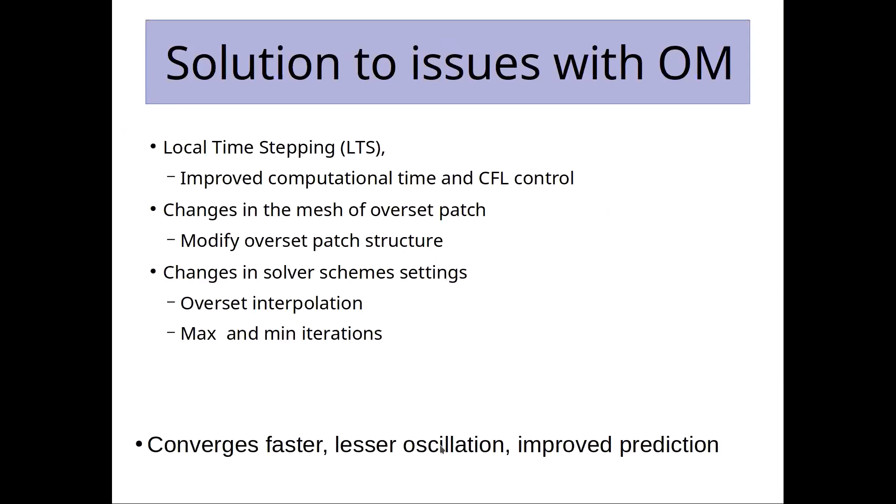So the numerical parameters here are just what I discussed earlier already. Euler first order is used with the overset, and backward for the sliding mesh techniques. So in the solver, FV solution, this is the best working parameters for the overset, whereas pressure can be solved using the multigrid method in the sliding mesh.

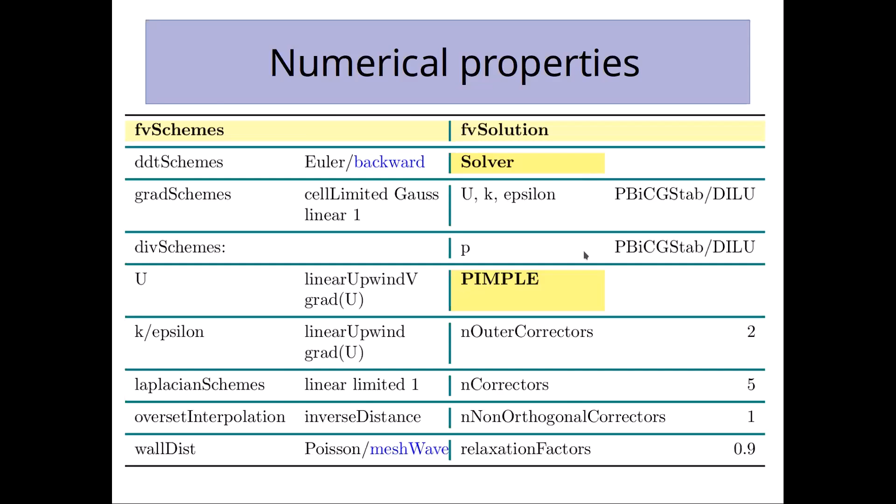So even though this method is very good for kind of vertical axis turbine or horizontal axis turbine simulation, and has better accuracy, if you want more modifications, it will be challenging.

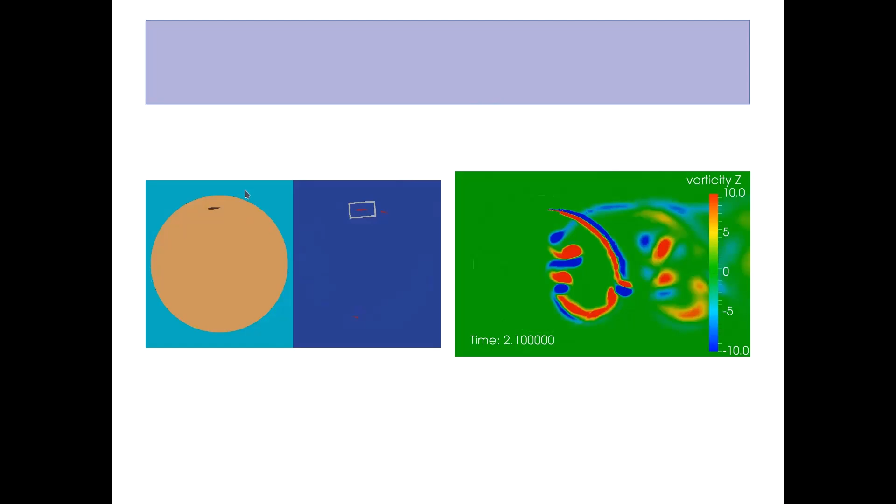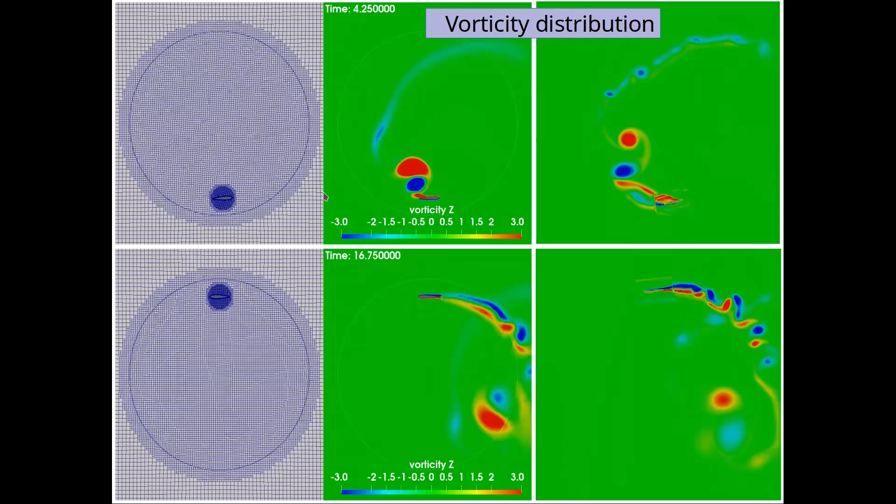So some vorticity distributions here: this is based on the sliding mesh, and this one is the overset mesh for the same scale of simulation. We can observe some kind of similarities after 180 revolutions and after 2 cycles of the distribution.

So the strengths and limitations we have observed: the sliding mesh is a suitable model, like for basic turbine cases, and it is accurate and computationally efficient. But at the intersection it can lead to mesh distortion near the interfaces, and if the geometry is complex or you have complex motions, this may not be useful, and it can result in poor quality meshes when there is mesh distortion.

On the other hand, the overset mesh can handle complex motions and geometries, like any complex motion, or if the geometry is complex, or if you have multi-bodies, like for example multiple flapping wings and oscillating cylinders with large relative displacement.

So this will be the main option. It maintains the mesh quality close to the moving objects because the mesh is created separately for the airfoil. You can maintain the best quality mesh for that particular model. So modeling of multiple moving bodies like overtaking of cars and so on can be possible with this.

So the problems we have seen here is the interpolation methods are not mass conservative and the results are sometimes diffuse. So you will have to experiment a lot to get a better working condition. And also sometimes it looks computationally expensive.

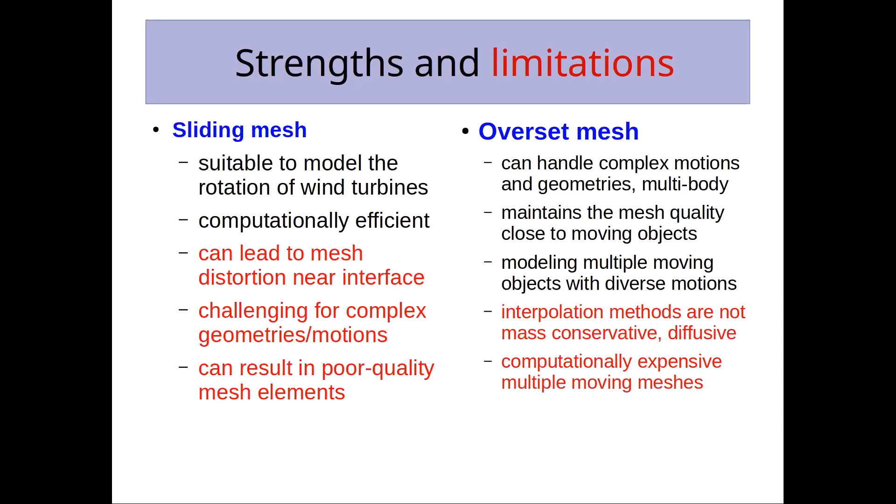For example, I have simulated 2 airfoils. If you add a third airfoil, it's some kind of limited mesh, and we are not able to expect by how much it will delay the simulation. So these things are not resolved properly. Yeah, so I keep it short for the time we waste.

So we have done the validation in comparison of the two methods. The OVERSET mesh can be used for exploring innovative designs. For example, if you want to pitch the blade while it is moving at the lower angle of attack or in the high drag areas, so this can be incorporated. Or some other designs like 2-axis turbines, so this can be best.

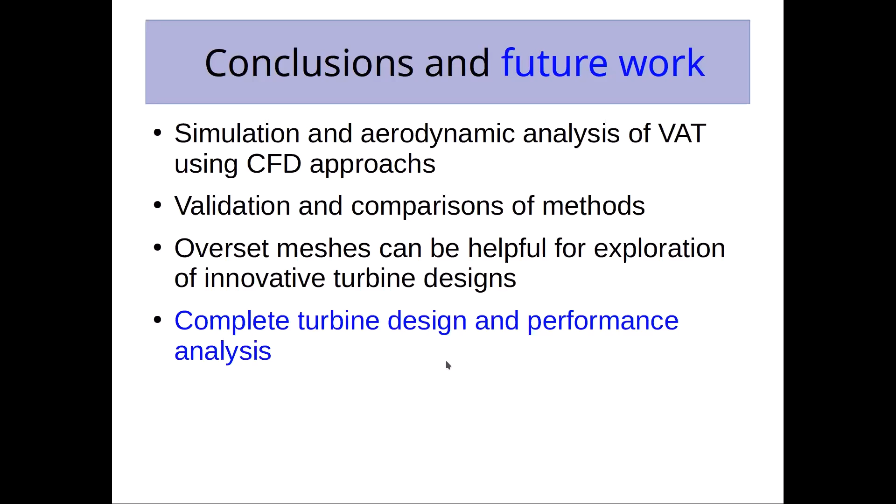So the future work will be a complete design and performance analysis of a turbine. And thank you for your attention and acknowledgements.

Thank you for your presentation. Hello? Can you hear me? Yeah, we can hear you. Thanks for your presentation. Yeah, we are struggling to connect at the end. Sorry, it's very noisy on our side because it's ringing all the bells of the church in the center right now, so it's very noisy. Okay, no problem, but my voice was audible a little bit. Yeah, no, we hear you very well, the problem is from our side, there is a lot of bells ringing. Okay, thank you very much. Sorry, are there any questions from the audience?